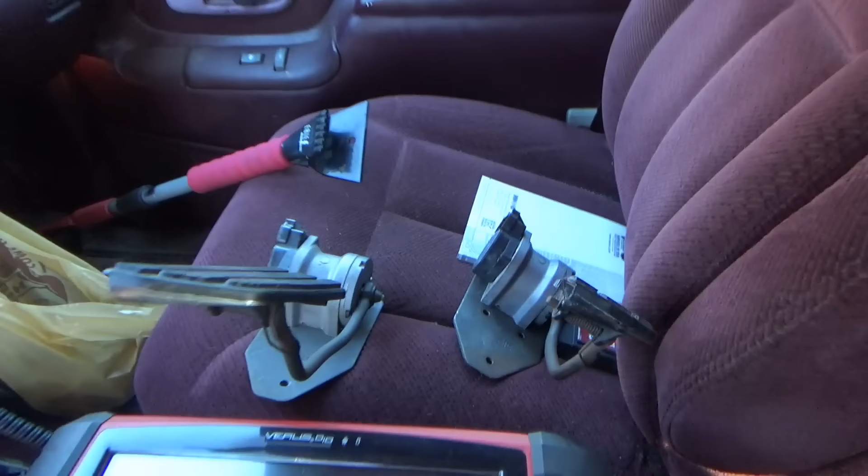He wants that addressed. What do we have in the cab here? We have gas pedals, and we have magic black boxes - electronic diesel injection. There's another one, and another one. What are those? It tells me that's the PDM, or the pump driver module. What is the pump driver module? How does it work? I have no idea. We're gonna have to do some serious research on this truck.

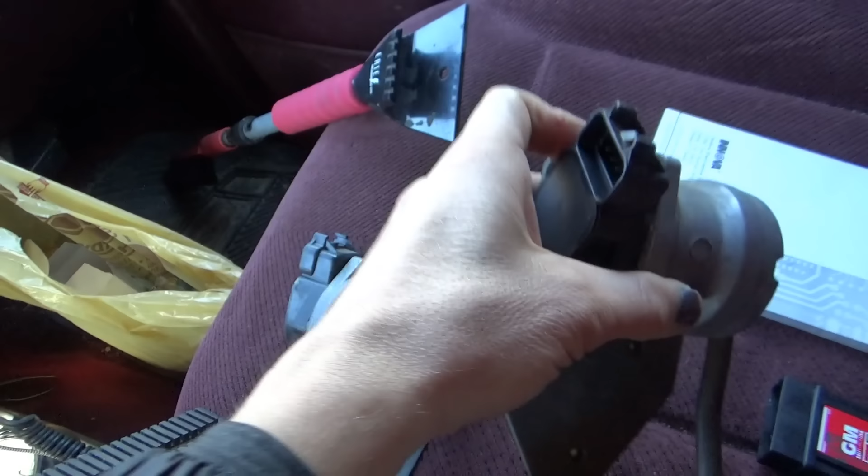But for now, let's plug in the old school GM 12-pin connector and the VERUS. Boot that up, look at some live data, see if it sets any codes, run it, see what it does, and then go on All Data and read about the system. What controls the throttle? Apparently this throttle pedal is a sensor. For 1995, that's pretty advanced, I guess.

So let's gather some data. First, let's take a peek under the hood. 6.5 liter diesel turbo. We have a Napa alternator, and...

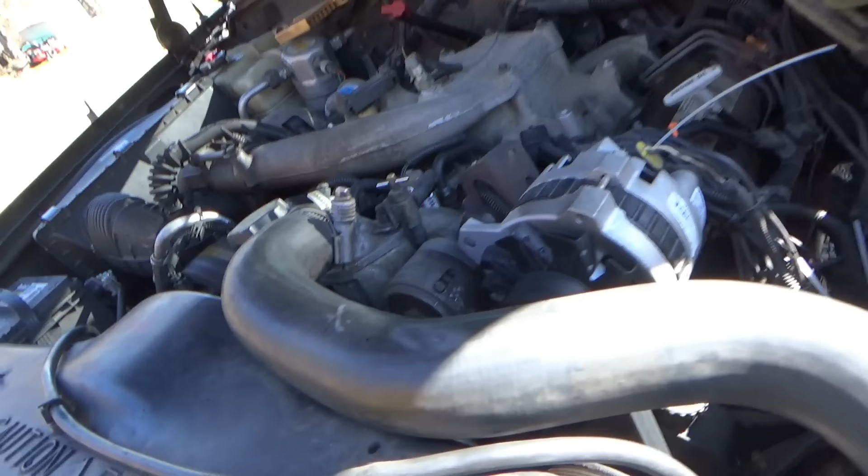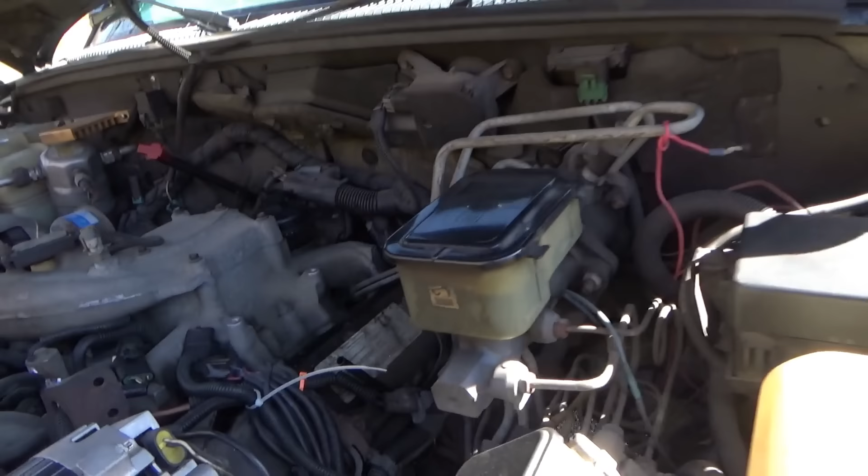Before we get too far, let's just quickly check the engine oil before we start this thing up. Where is the dipstick? Engine oil right here. Yeah, close enough, as long as there's some in it. Looks like black sludge, it's probably normal. Coolant level is fine over there.

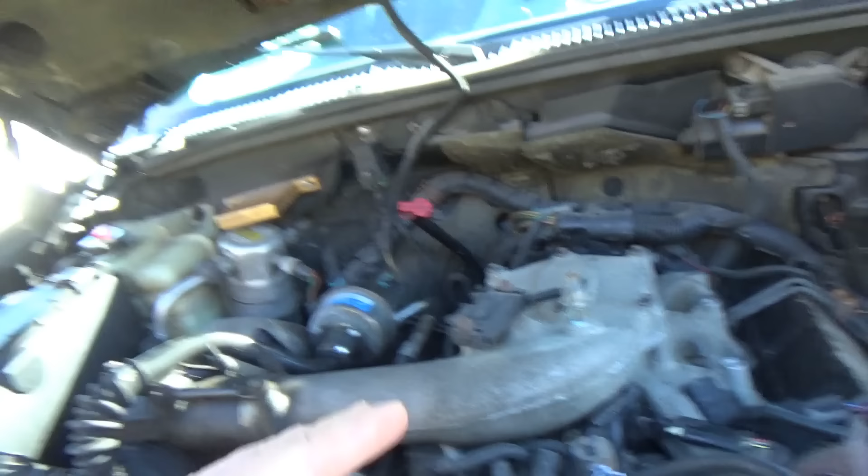Plenty of coolant. And I think this black box lives right here. So this looks like the diesel injection pump, and the owner told me that apparently these are failure prone because they live right here and it's super hot inside the valley. So when he got it, it already had a little pedestal here to relocate that module. So it sits on the pump, but if you take it off the pump, it's not interfacing right there, it's interfacing through the wires. So there's the original plug, and then these pigtails - there's one right here that goes down there. Two different pigtails, and he said this is the one he just installed. The flying wings of quality, but it is made in the USA.

Okay, 1, 2, 3, 4, 5, 6 wires there. There's the other pigtail. So apparently people relocate these under the front bumper to keep them cool - these pump driver modules. That's the information that I have.

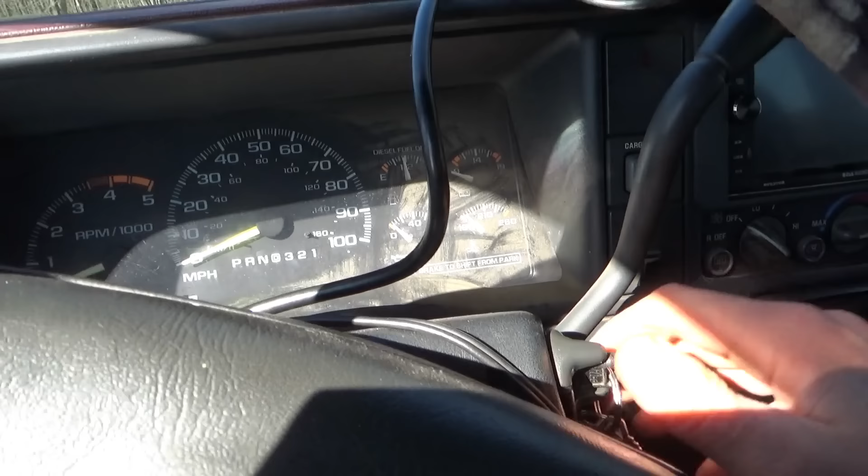Let's fire it up, see how it runs. Boot up the VERUS here. Well, let's log in first. Okay, so we have our truck identified correctly. So the VERUS is the only tool that I have that will work on this, that's why it's priceless. Let's see - engine, automatic.

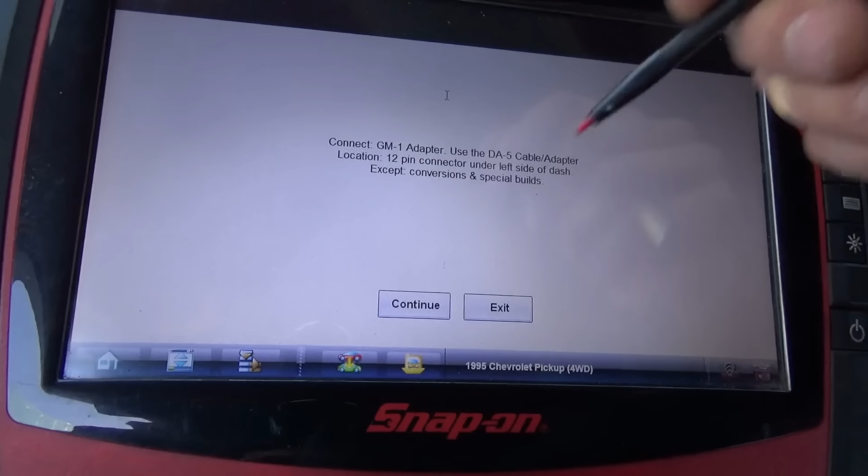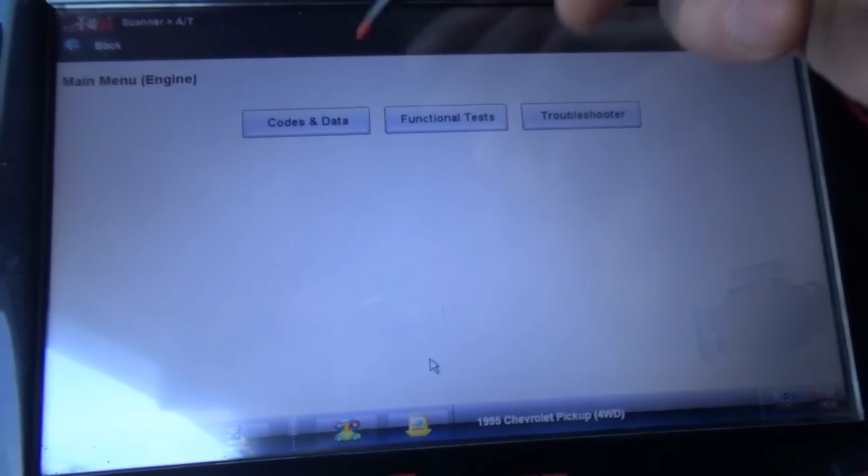Let's turn the key on. Special adapter, yes. It'll start talking to our little module. Ready to start - the glow plug light went out. Let's just see if there's any codes.

Current codes - no codes present. History codes: transmission input speed sensor fault, pedal position 2, 5 volt reference fault. Okay, so history doesn't mean they're happening right now.

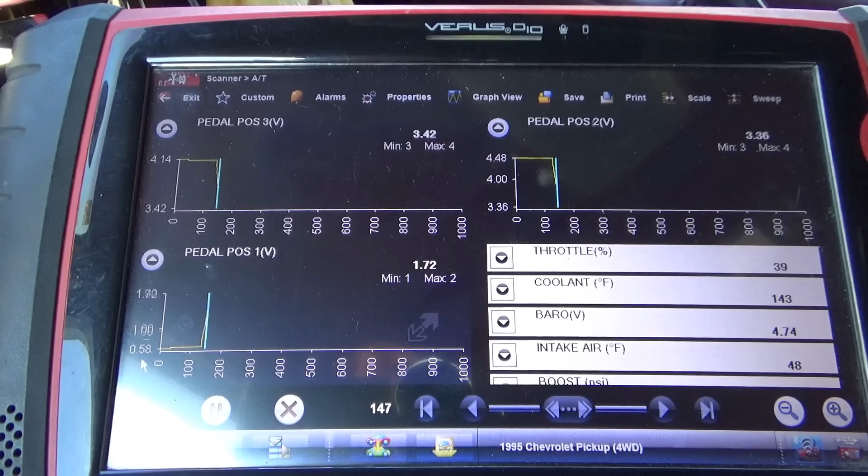Go right into our data. Now the pedal they put on here is also Napa aftermarket, and he said he tried an OEM from another Chevy diesel and nothing made a difference. So I don't think there's a problem with the pedal, but we can look at the 3 position sensors here and just depress the pedal slowly all the way down. That's floored - see, throttle is 96%, and all the way back up. So that looks fine, but I just want to reinstall one of the original pedals.

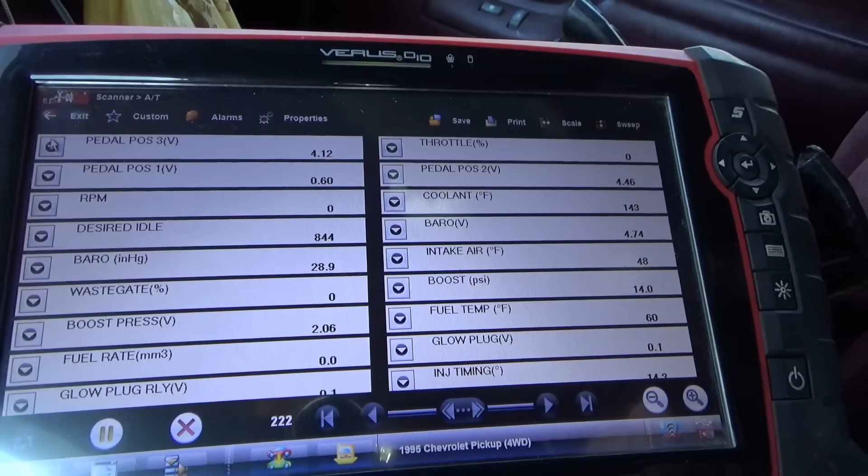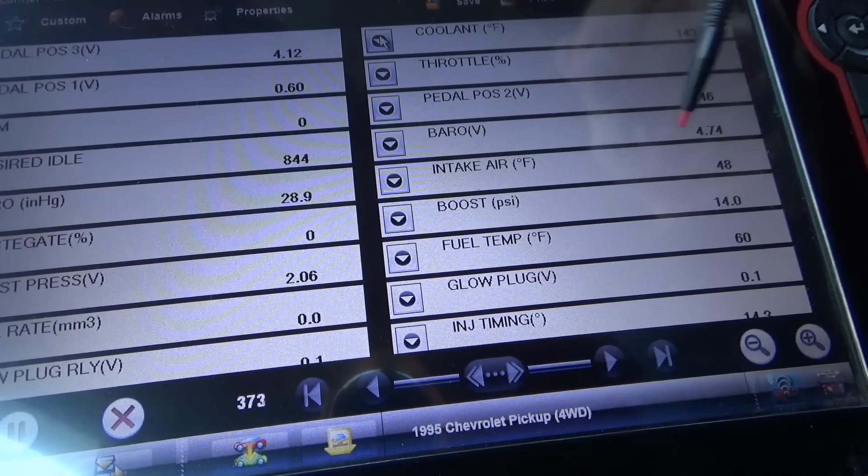Boost PSI 14. Coolant 143. Huh, well how about that? I don't like this. Coolant sensor. Okay, air intake, that's 48. You know, that's accurate, it's in the mid 40s right now outside. So I don't like that coolant sensor.

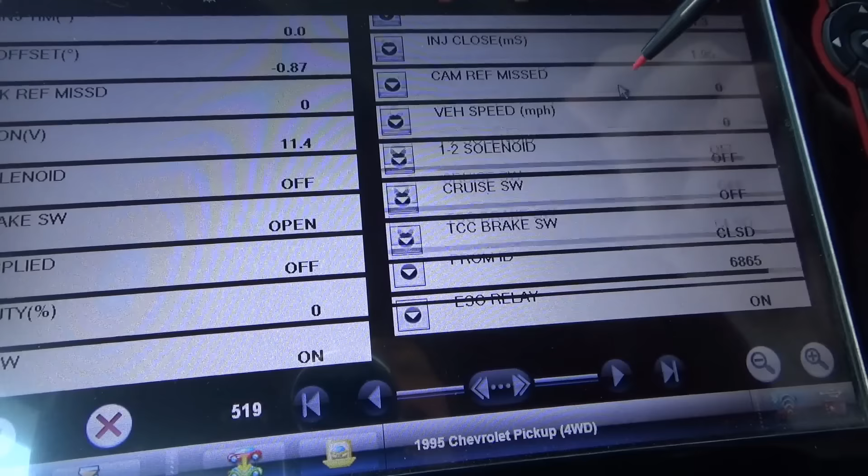That's a red flag - TDC offset, injection timing. Some of these data PIDs I'm not familiar with, we can always look those up. Injection timing degrees 14, injector close milliseconds - okay, that's fine.

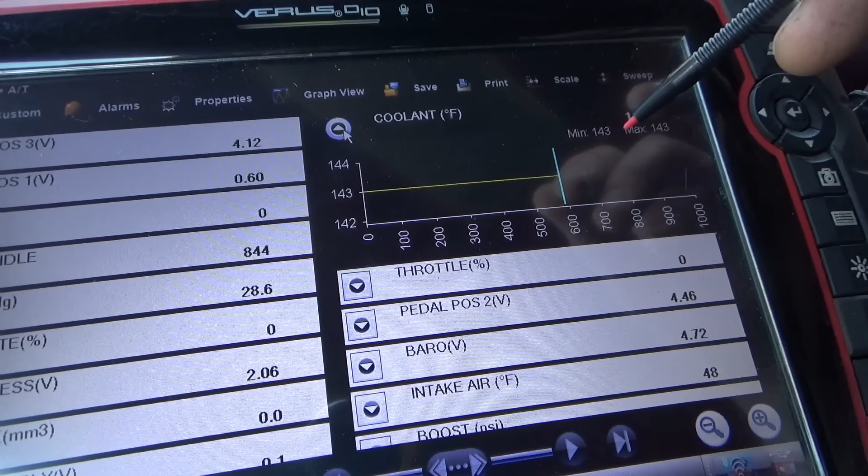So coolant temp - before we start this thing, let's unplug that. Or should we start it, see how it runs first? Yeah, let's do that. Okay, crank no start.

Woo! Okay, not happy. Not happy at all.

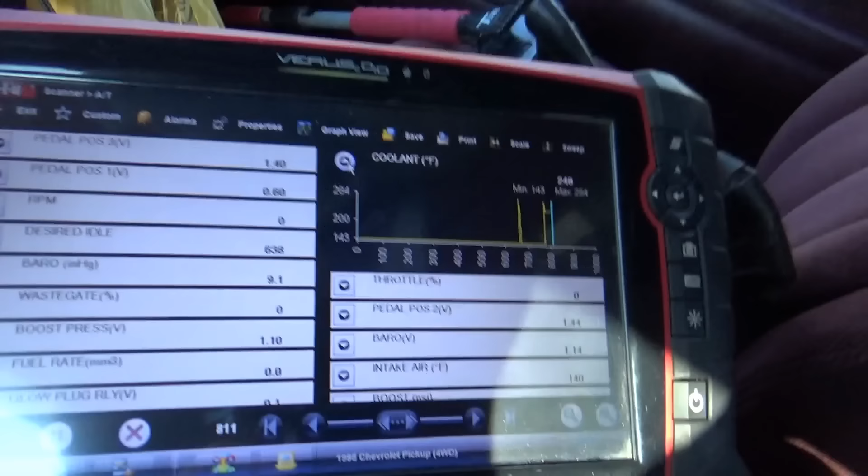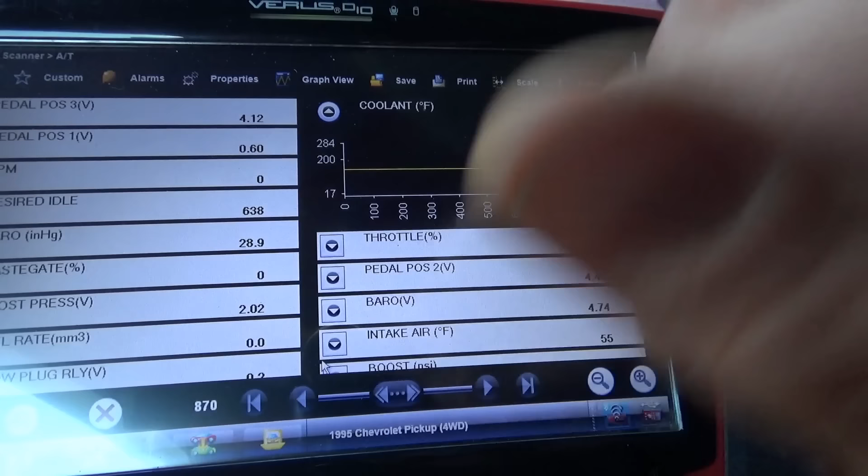Look at that, coolant 248. Key on 143. Let's record that data and unplug this coolant temperature sensor. I just want to see what it does if the coolant temp sensor is unplugged. Alright, so we're at 150 degrees right now. I assume this is the sensor, I'm just going to unplug it.

-7. Alright, plug it back in. 152. Let's leave it unplugged, see what happens. -7. I guess you're not supposed to run a diesel below -7 degrees Fahrenheit.

Okay, key off, key on. 2,000 RPM, woo! So it does that. Crazy, the customer did not tell me that it does this.

Okay, the next thing I want to do is unplug that Dorman smart box. Now I looked at some info, we'll look at it in a second. But that module controls basically the amount of fuel, that's how this engine controls its engine speed. There's no throttle body, it's just based on the amount of diesel injected. There's a big solenoid on the front of the pump, so this is the shutoff solenoid, there's another one you can't see under the intake manifold, and that's what's controlled by this box through signals from the engine computer. So if you unplug that, that solenoid should stay shut, and we should get a no start.

That's crazy. Alright, so I'm going to use the decade box here to dial down this coolant temp. Let's see, if we go up in resistance it's going to go up. We need to go down, down, or up.

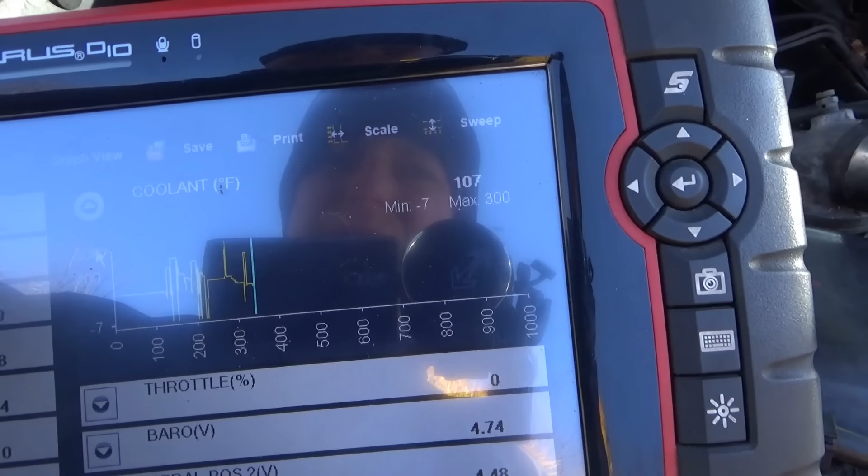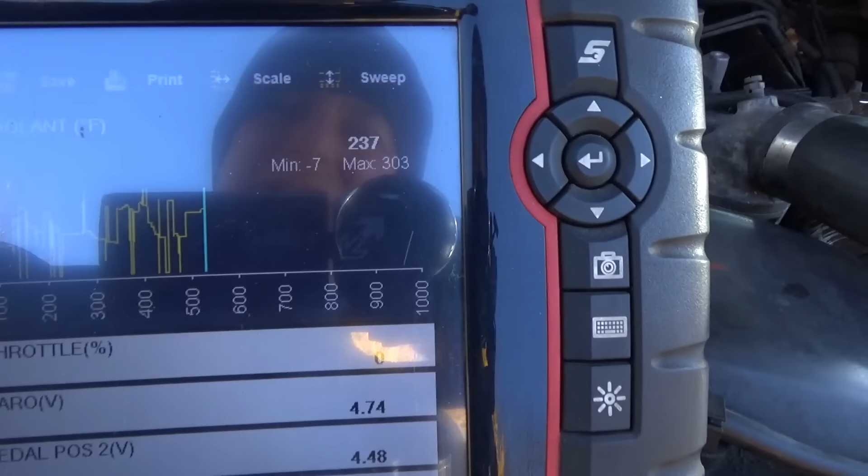So, 113, 107. What the heck, how does that make any sense? How did it go from 107, 122, to 260? Is it some kind of dual resistor thing? I want to get it down to like 50 degrees. This doesn't make any sense to me.

Huh, alright I got it. So it has to be like 2 kilo ohms, that's 87 degrees. 84, 82, 64. Let's try 64, we'll leave it at that. Start it up, we can clear the codes out right now.

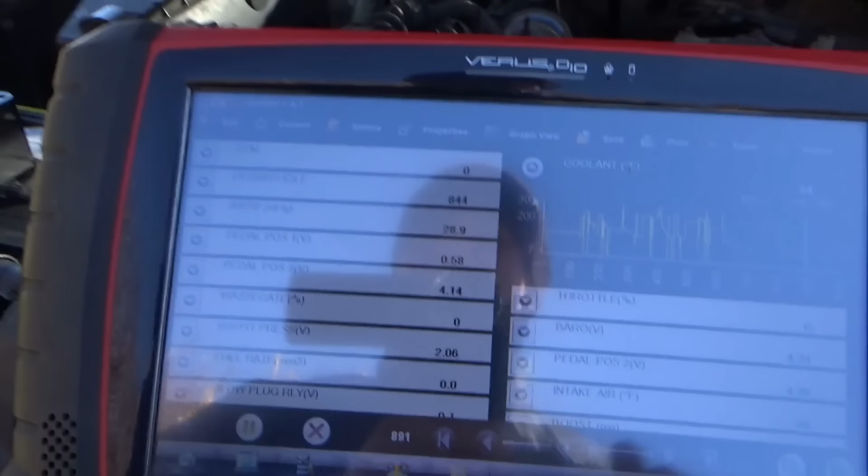It's fun playing with these old, old vehicles, and the guy's taking it to several shops. He's about 2 hours away, and they're like, take this thing out of here, we don't want to deal with it. Understandably, these would cost the shop a lot of time to do it right, and they probably don't have any of the older guys, they all retired who used to work on these things.

So the history codes are still there. No current codes.

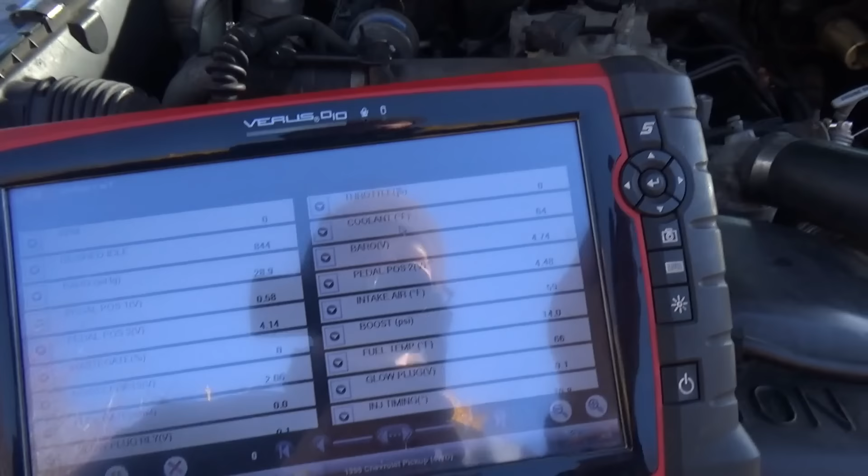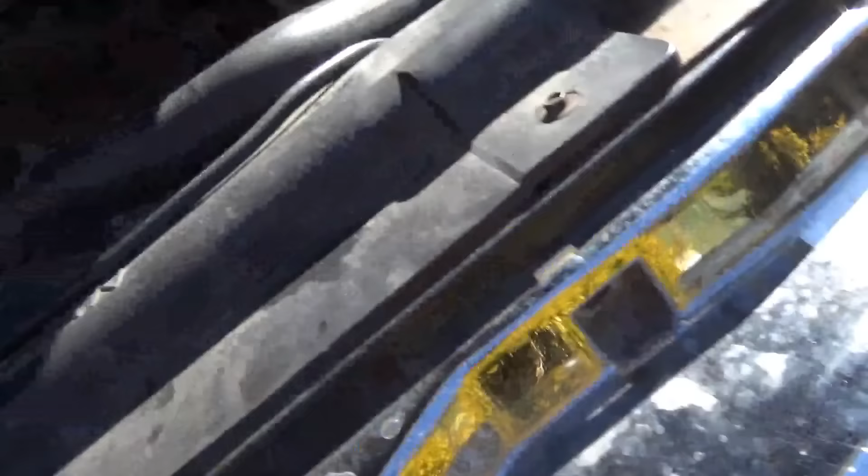We're going to need to get the scope out for this, because we know that for some reason that solenoid is being commanded crazy open, and then it's falling on its face. It could be a computer fault, like the ECM for sure. We'll need to look up some information and then see where we want to attach our scope. But I tried all the modules again, and they are doing exactly the same thing, where it just goes up to 2,000, it goes woo, spikes through the roof, comes back down, starts bouncing.

Yeah, pretty crazy. All right, let's see what this thing does with coolant temp at 64. Not happy.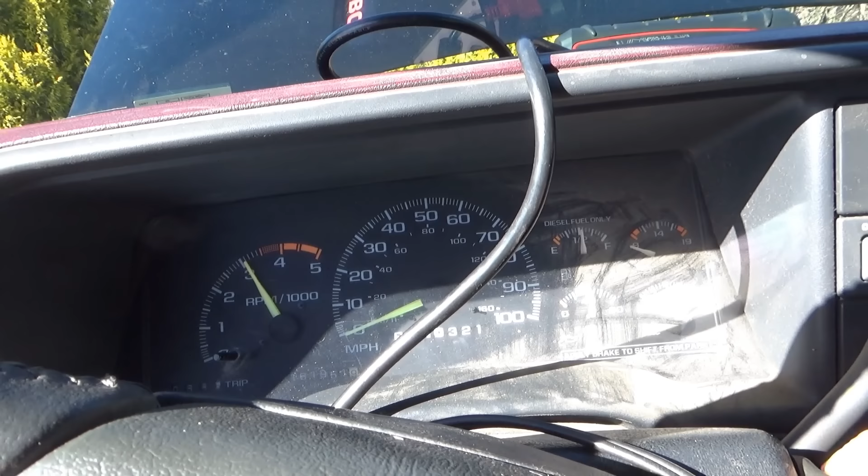Oh man. Yeah, let's get some wiring diagrams and let's see where to hook up our oscilloscope. So with the truck running like this, no codes present. That's how dumb these old systems are. Obviously there's a problem.

So I put the original accelerator pedal back on. So off the accelerator, we're here, on the accelerator, it revs a little bit more.

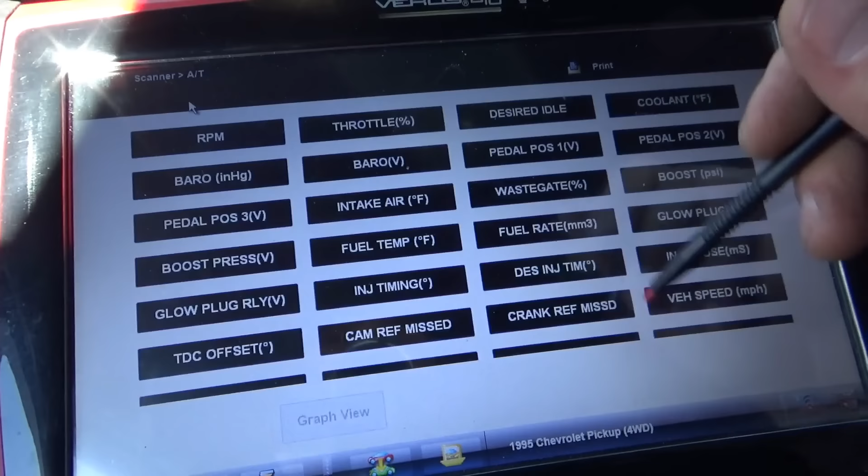If we look at the data, these fuel related... see that fuel rate? Boost PSI, that's almost not changing. It goes up a little bit.

Let's put it in gear. Blah, blah, blah, blah. Oh yeah, fucking Bronco.

So it's trying, but something's really wrong. When you first start it up, it's at 2,000 RPM. Why does fuel rate say 0? Now I'm going to touch the throttle, and now it's going to go into that funk.

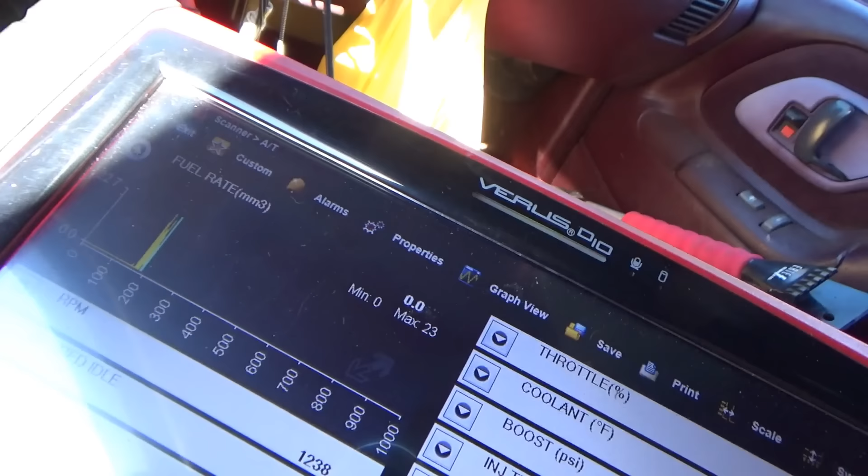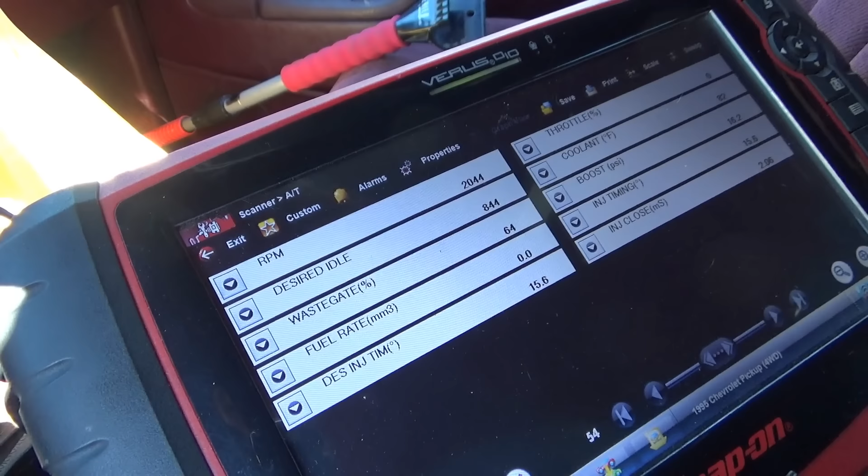Let's try again. 2,000 RPM. Keep in mind, desired idle is 844. We're at 2,000, exactly 2,000. Touch the throttle. Wow, wow, so definitely an electrical problem. I'm 100% sure of that. It's not like the injection pump solenoid sticking and so on.

We gotta get a scope on this thing. Definitely don't want to blow up the engine and redline it. Let's see what the computer's commanding this pump driver module to do.

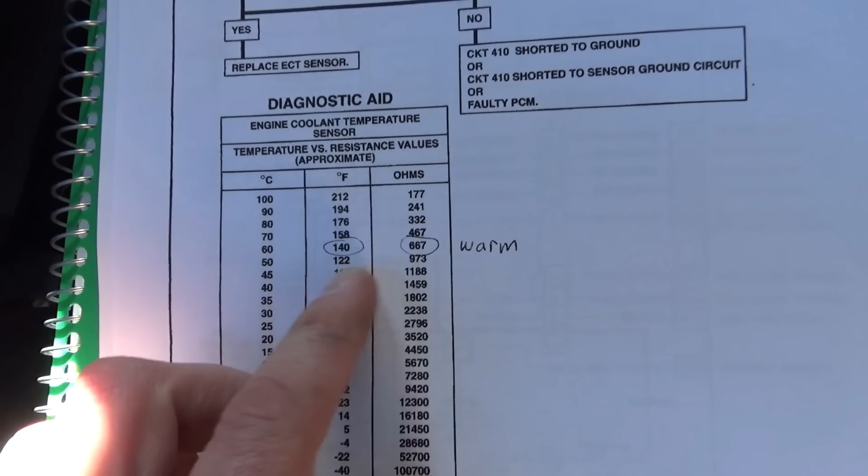Alright, did some research online. First, let's start with the easy stuff: the coolant temp sensor. There's a chart of temperature versus resistance. Right now I actually measured the sensor at 667 ohms, which should be about 140 degrees Fahrenheit. That's reasonable, we ran the truck for a little bit. Now let's plug in the sensor and see what the scan data reads. It should be 140. Remember, we started at 150, which doesn't make any sense at all.

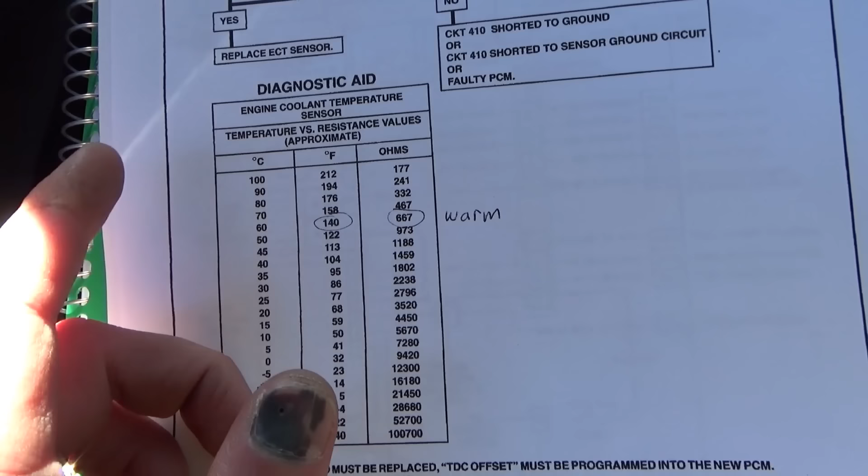Okay, we can use the decade box to see if the PCM's table inside is reading these correctly. Alright, so I plugged in the sensor, we're reading 132 degrees Fahrenheit. So that actually seems normal now.

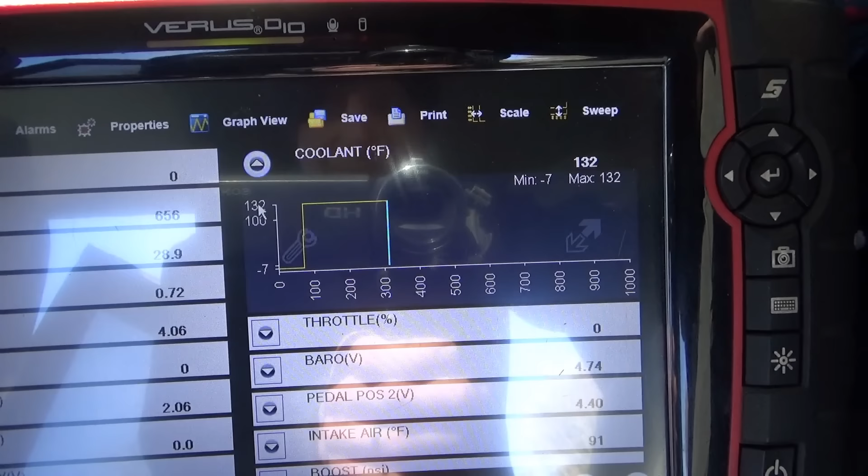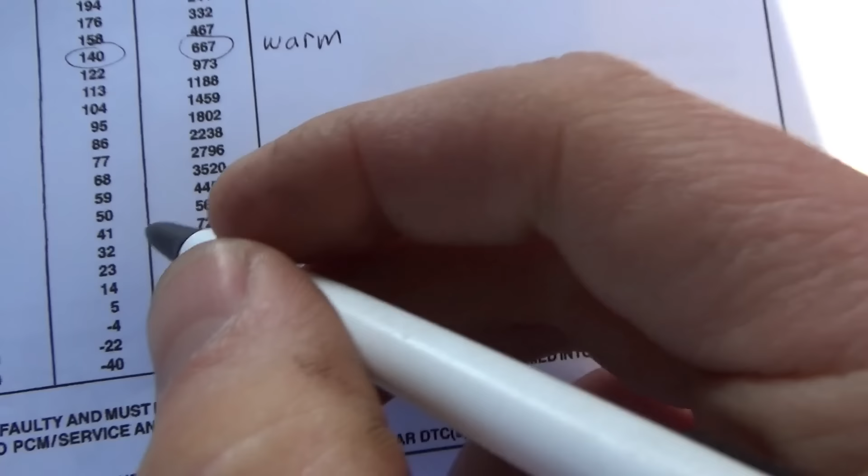That means our coolant temp sensor was misreporting when it was cold. Very interesting, so at 70 degrees, or even when we start at about 50, it should be about 6,000 ohms. It was way off, it was reading like 500 ohms. So the coolant temp sensor is definitely bad, but the computer is reporting correctly at the moment.

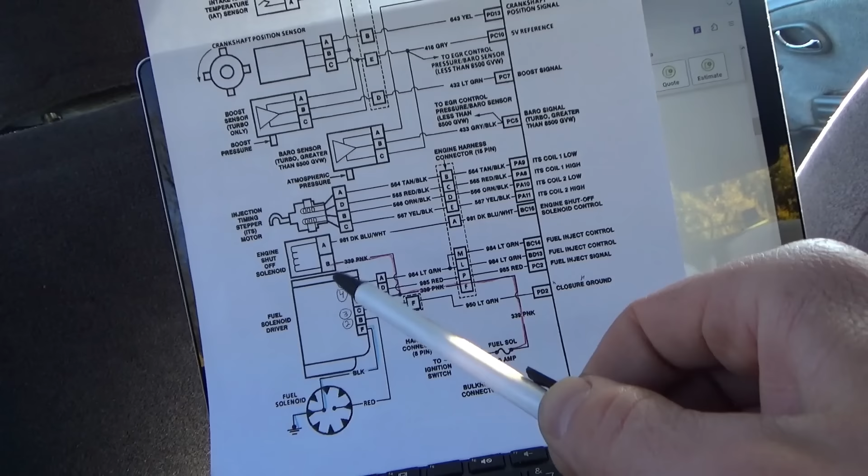Now let's look at that fuel injection system. Alright, so I have the diagram printed out for this fuel solenoid driver, and this is the pump. This is the PCM, and you can see there are several components controlled by the PCM, and the fuel solenoid driver is what controls this fuel solenoid, basically your throttle control. So we have this fuel inject control, 2 pins go into 1 pin, and then fuel inject signal, closure, ground. We don't know what any of these are, but this is where we're going to do our testing.

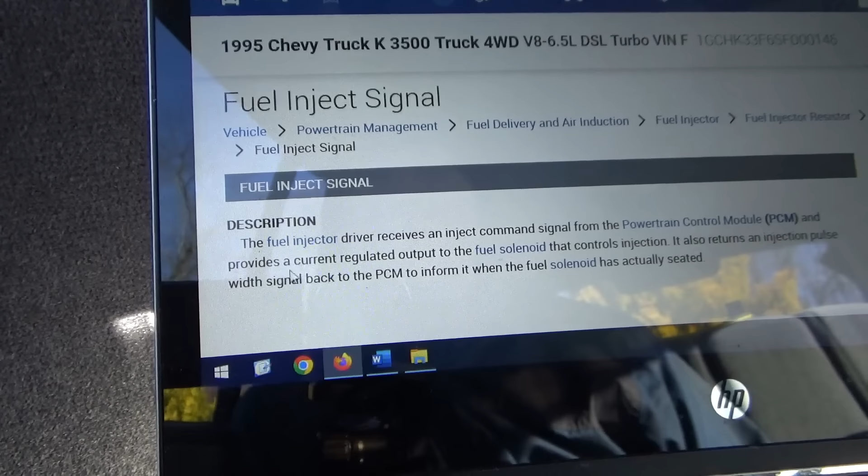If we read the description and operation, here's what the pump looks like. It has 8 high pressure outlets, and pin item 7 here is the fuel solenoid, that is what's controlled by the fuel solenoid driver. The fuel inject signal, the fuel injector driver - that's the PMD - receives an inject command signal from the PCM and provides a current regulated output to the fuel solenoid that controls injection. It also returns an injection pulse back to the PCM to inform it when the fuel solenoid has actually seated.

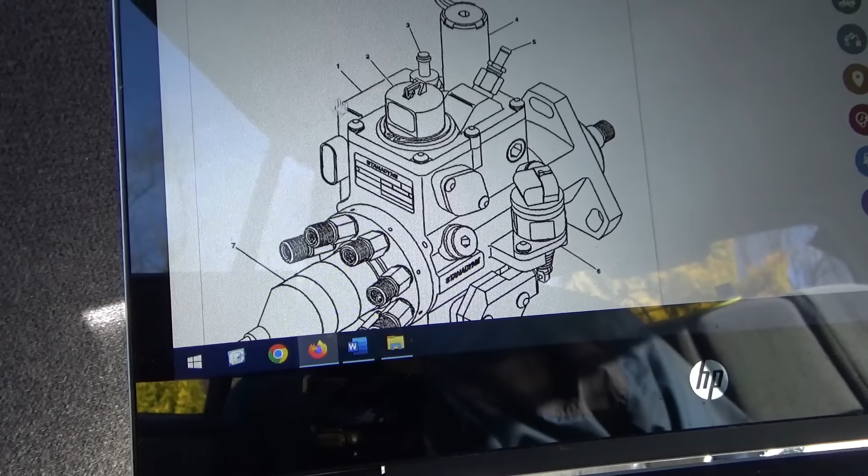Okay, very interesting. So on this thing, this is our magic box. Number 1 is the fuel solenoid driver, and it drives the fuel solenoid. So the two wires go from here to here, and on our diagram, these are the 2 wires. So there is a ground, we should check that, obviously.

Basically disconnect this connector, and it's easy to do because we have like 4 spare driver boxes. Make sure we have good power with the key on pin D, pink wire, and then a good ground on pin F, that's the black wire, through the solenoid.

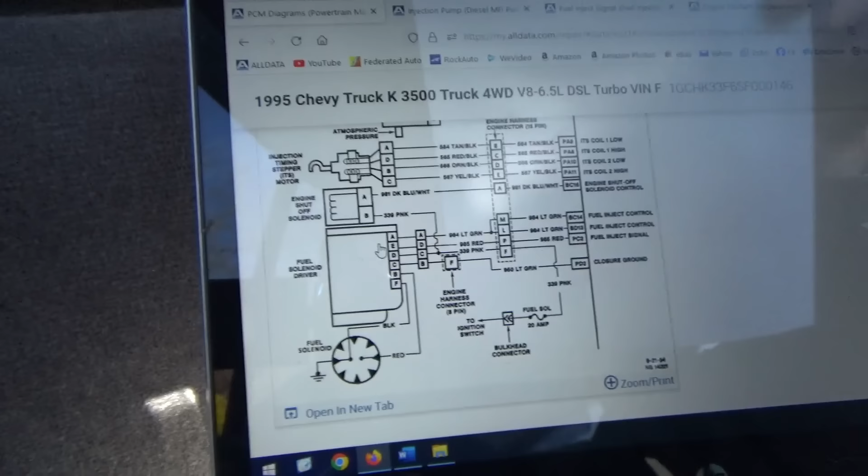Okay, then we're going to put the scope on here, and I want to measure the other 4 wires, the interesting ones. Channel 1, pin A, is going to be our fuel inject control from the PCM, telling the fuel solenoid driver how much fuel we need. Channel 2B will be the output to the actual solenoid, the voltage driving it. Channel 3, this closure ground - again, we don't know exactly what it does, I couldn't find it in the description, but we can see what it does with the scope. Channel 4 is going to be this fuel inject signal, I'm guessing that's like a feedback. So let's set up those 4 channels and fire this thing up.

Alright, let's do the easy checks first with a test light from battery positive.

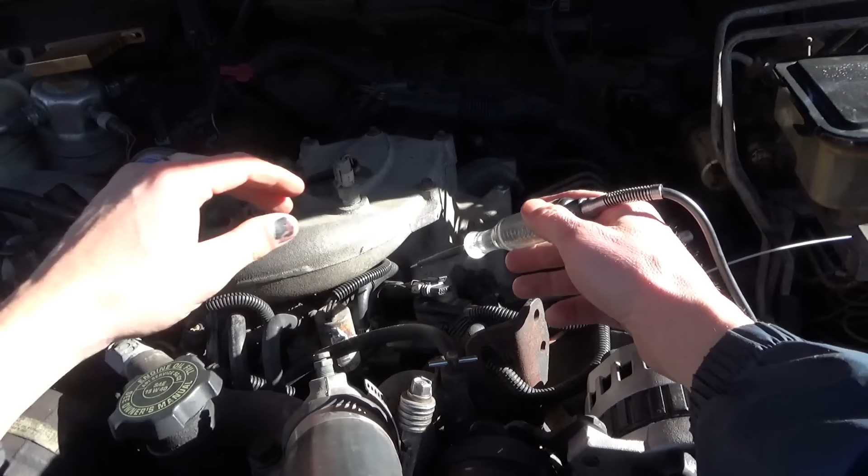Pin F on the truck side connector should light up the test light. That should be a good ground. Now the sunshine might be a little bright, but you can see the test light light up right there. So that's good. Now let's check test light to battery ground.

Let's check the ignition feed on pin D. With the key on, we should have power on pin D, and I expect to have power since the truck does start and run, and you can see that the test light does light up there.

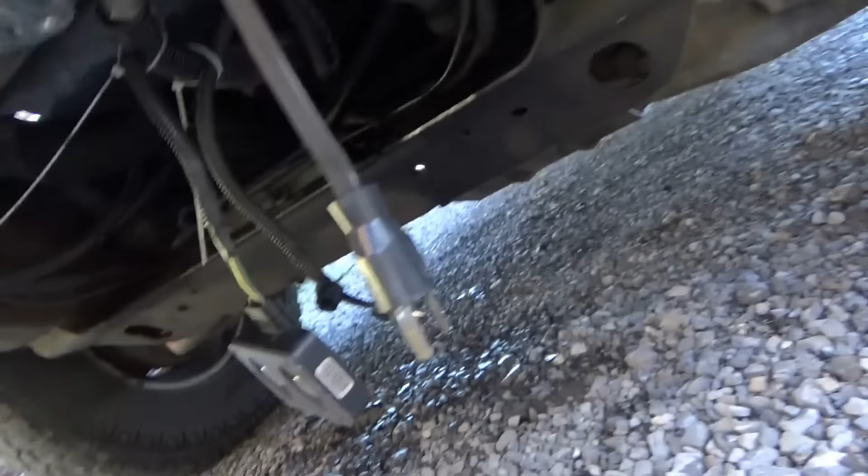So now let's hook up the scope to the other 4 pins and run it with one of these modules. Alright, we got 4 channels on the PicoScope, so pins A, B, C, and E. We measured, we verified powers and grounds on pin D and F, so that's fine. We got 4 more pins, and we're going to use this one, the supposedly OEM module. They all perform the same, but giving it the best chance that it has.

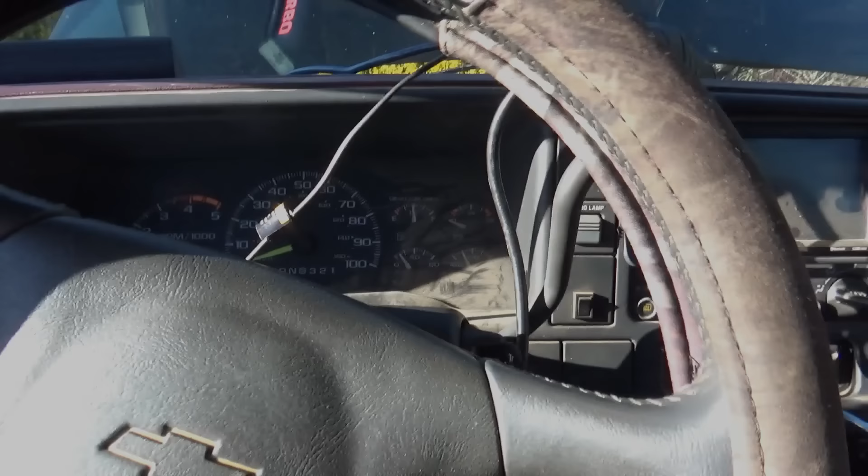So let's fire up the PicoScope and see what happens. Alright, we got 4 channels. Key on. Okay, so it's actually idling. I'm going to give it just a little bit of gas here. Revs up to 2,000. As soon as I touch the accelerator, it just completely redlines. Okay.

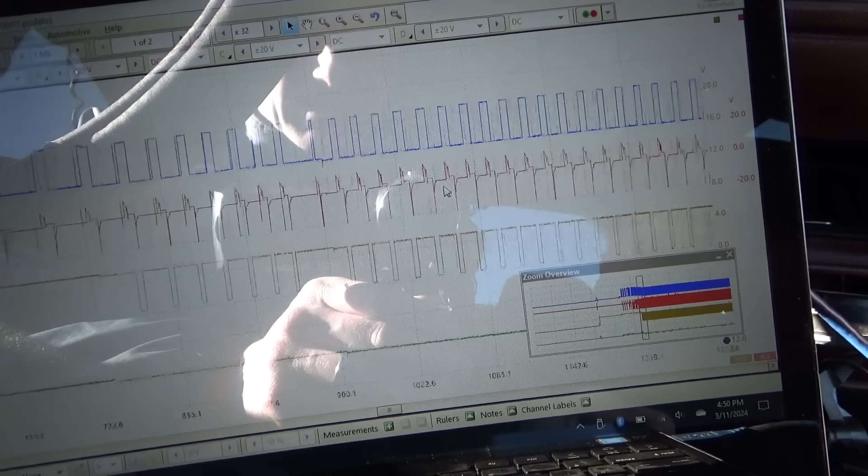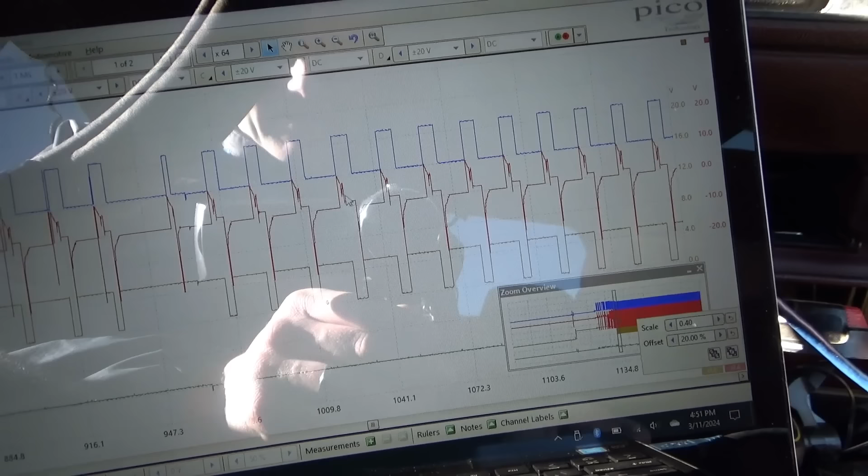Alright, let's take a look at this data. Channel 1 is PCM to PDM control, and then the PDM fires this coil. Now I had to reduce the scale by a lot so it wouldn't take up the entire screen, because it looks like this. There's voltage spikes on it, but it does fire the coil and hold it.

So this is one event, and this glare is going to be ridiculous. I might have to review this footage somewhere else. Alright, let's review the data. Got a little glare shield, and well, first we can say that the modules are doing what they should.

So the computer is commanding the module on the blue channel, so there's a pulse width, and then the module energizes the injector and holds it at a certain voltage until it's commanded to close, and we see a nice spike. That means the actual whatever fuel solenoid moved, and we have this feedback pulse. So everything is there. Now, is this pulse width modulated? Is this duty cycle controlled? What's the strategy?

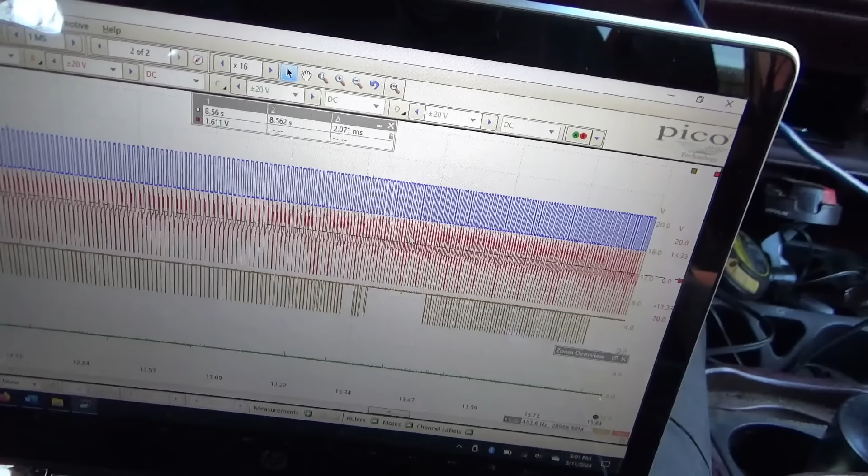We can look at the low and the high RPM zones. Here's when it really went out of control, to like 4,000 RPM. And you can see the feedback just started dropping out, because that just went nuts. But...

Like this pulse width, that's the injector on time, or the fuel solenoid on time. Not injector, just the fuel solenoid. The injectors are passive, they're just nozzles. So it's like 3 milliseconds. And then we have this confirmation pulse. So I think this injector close data PID is what is supposed to report that's this right here. See, 3 milliseconds.

In the beginning, when we first started it up, right here when it was still running at like 1,000 RPM, see, delta there is 5 milliseconds. Okay, well...

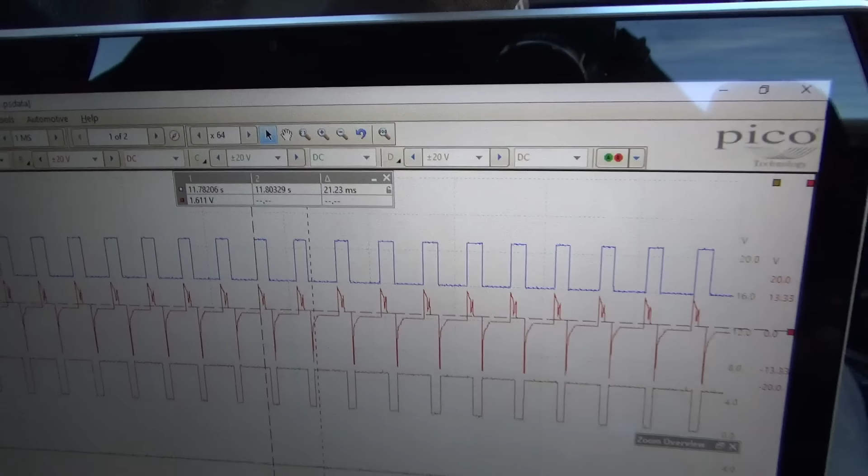Is it normal? Is it abnormal? We can measure the hertz. I don't know how many pulses it does per engine revolution. It might be a good idea to grab the crankshaft position sensor waveform just to see the RPMs and correlate them to this scope capture.

But from all this data, what are the possibilities here? Bad ECM, that's just making this fuel solenoid open way too much, or a bad module, which is very unlikely. We tried 4 of them, they behave the same, and according to the scope, the module is doing what it should, and the solenoid is also doing what it should. It's following the module every time it pulses it. It's like buzzing, opening and closing just fine. But as soon as you touch that throttle, the ECM, something commands it to go crazy, and just the engine goes through the roof, the RPMs.

So it's looking like an engine computer problem. Now I want to correlate this to scan data to see what's out of whack. We have a few data PIDs, injector close time - I'm not too worried about the injector timing. There's that stepper motor that controls the timing of the injectors. We're worried about fuel volume here. That's the main throttle control, and that's what's acting up. So let's do a few more experiments to prove that out.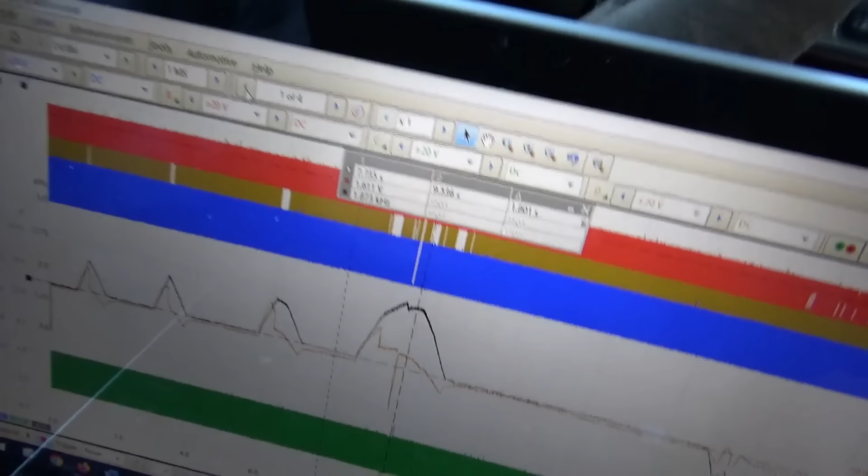So let's move to where I started the truck right here, and it actually kind of idled lumpy, but idled at about 650 hertz or 650 RPM. Okay, so that's fine.

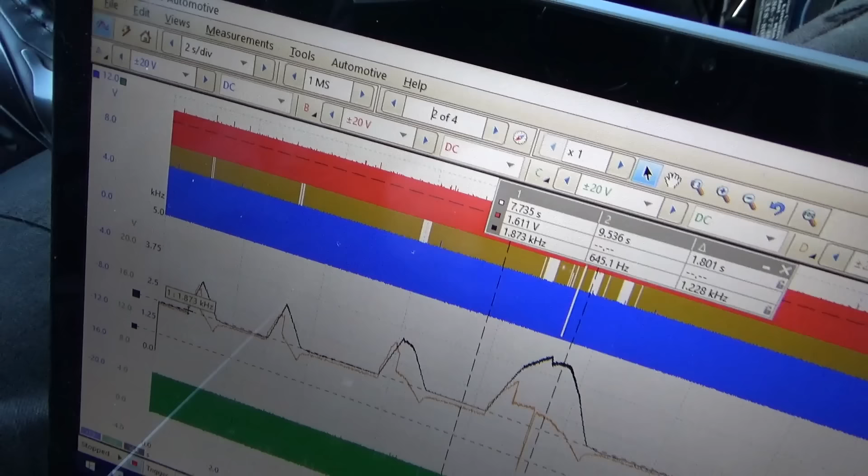And then I touched the throttle, and the RPMs went up to that 1800 mark where it likes to hang out. Then it did a couple throttle blips, and the RPMs jumped up really fast and came back down to 2000. Then here it basically revved through the roof. There was a little fuel cut, and then it came back to 2000, and then back down to 650. I put it in gear, then shut it off.

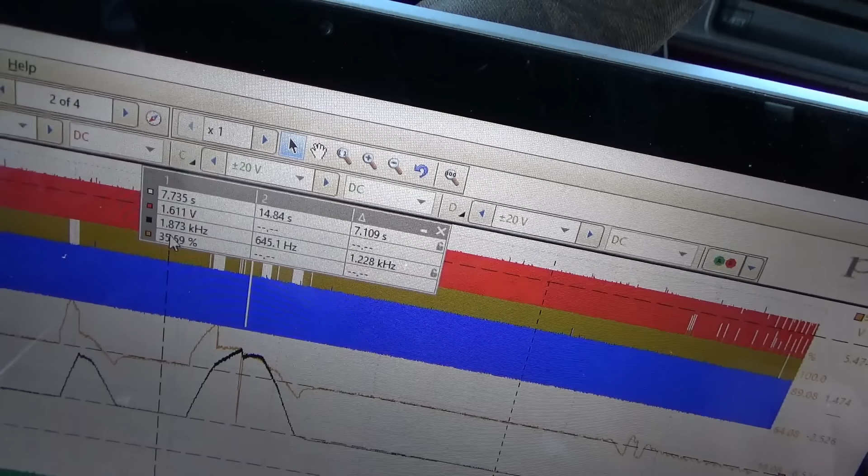Now, what is the PWM command? That's this blue trace, and for the blue trace I want to graph another math channel, which is the duty cycle of the blue trace. So for example right here, it's really nice that PICO shows you we're at 35% duty cycle. And if you want to confirm that, just zoom in where your cursor is, and yeah, that's about 35% on time. Very cool.

So in math channels, what I'm talking about is duty of A. If you want to change that, just click Edit, and right here you can select frequency, duty cycle, anything, and then channels A, B, C, and D. So the orange channel is coming from the blue, and the black channel is coming from the green, that's the RPM. I want to see what's the command, and then what are the RPMs doing based on that command.

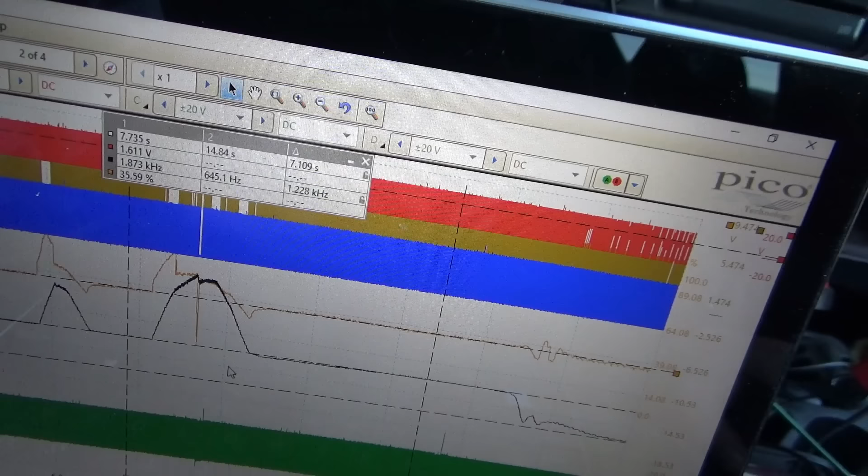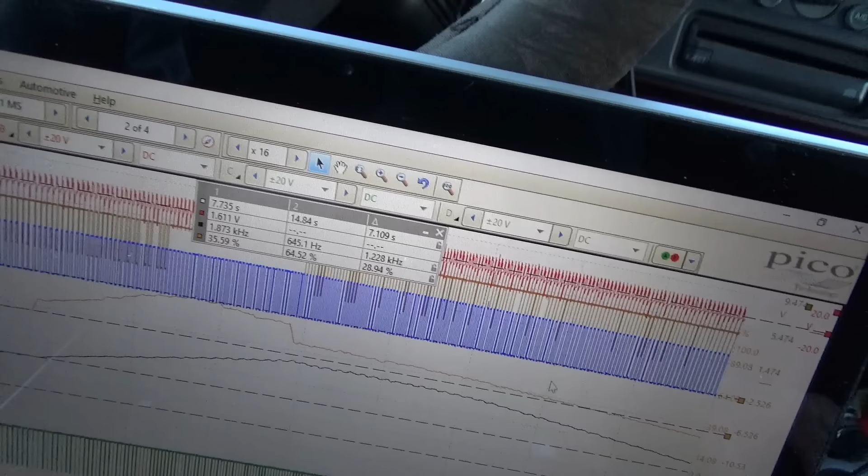So when it revved up really fast, look what happened to our command. It went up to a maximum of 64%. See that on time? 64%. And it happened extremely quickly. This ramp up right here, from 35 to 64%, right there I touched the throttle and went really high duty cycle, and then dropped back down, the RPMs came down to 2,000.

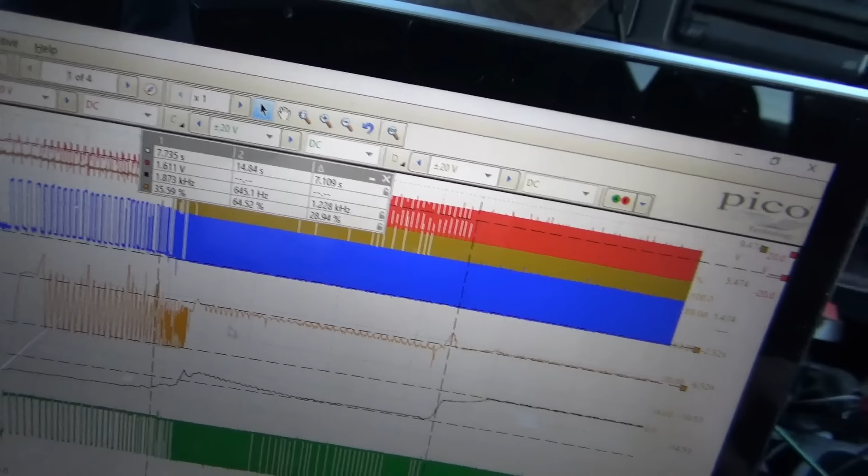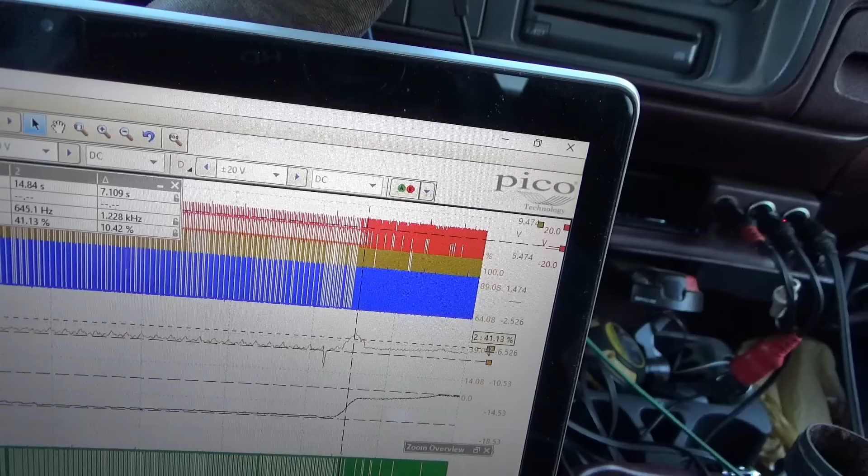Okay, let's go back to where it started. So let's look at the duty cycle right here, about 30%. And then it bumped up to 36%, and the engine speed went up to 1800 RPM from 700.

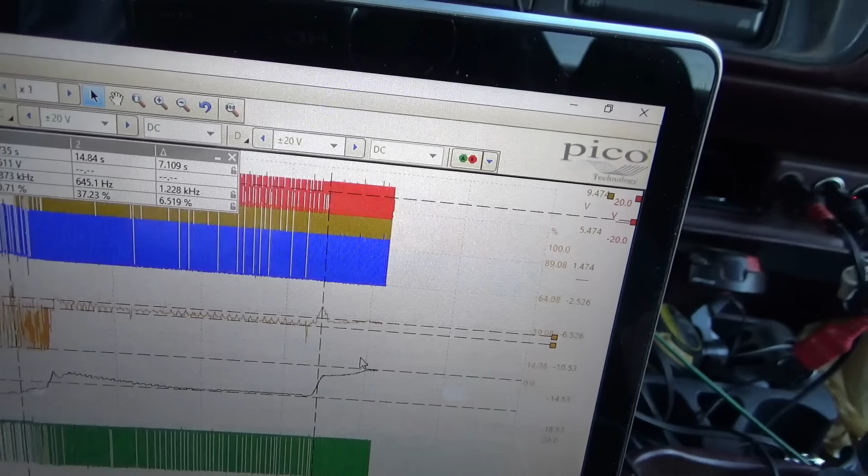But during these events right here, where it just ramped it up really quickly, the computer is doing that. But why isn't it reducing this duty cycle down to where the desired idle is? Here it hit the rev limiter, so it cut the fuel completely. So the RPMs eventually did fall.

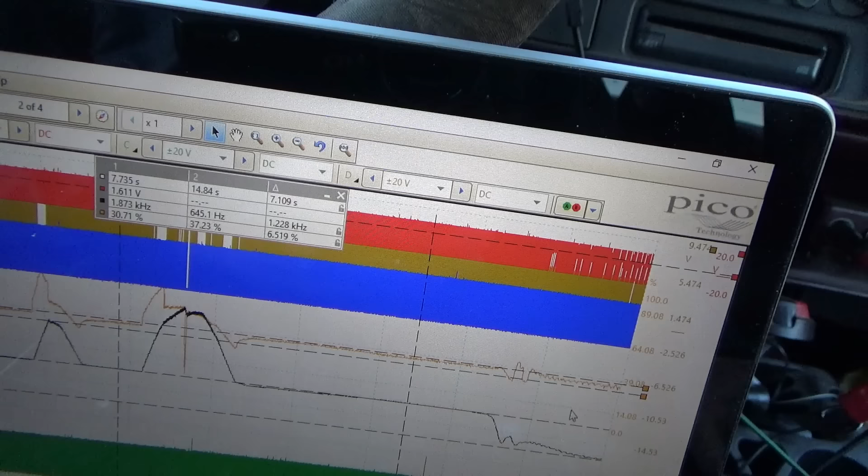So is the PCM commanding the wrong thing? That's my question. Because right now, we're deciding, is it a bad PCM? Is it commanding the wrong thing? Or is it a failing injection pump, like mechanically maybe the solenoid's sticking or something? Right now, this data is telling me that the PCM is in control, but it's doing weird things.

For some reason, why would the RPMs just stick at 2,000? It's not like a broken spring of that solenoid, then it would be a lot more erratic. This is kind of repeatable. You touch the throttle, it goes way through the roof. The duty cycle command increases drastically. You can't gradually increase the throttle.

So let me save this. We'll do another running capture with the throttle control. And then, are we calling a PCM? Maybe it's a bad prom chip in there. This is old school stuff. So there's a couple more things left to do.